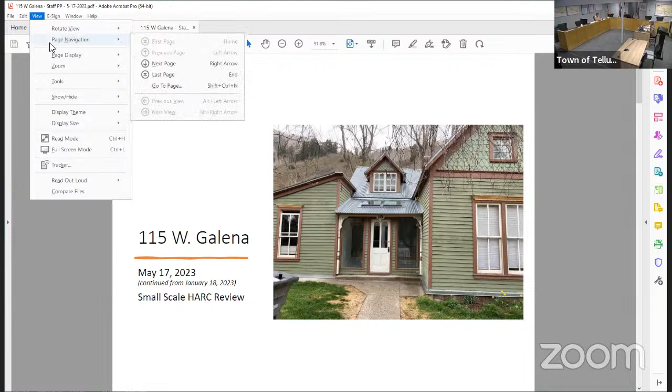Zone district is historic residential. The owner is the No Quarter Trust. Applicant Chris Hawkins, Alpine Planning LLC, and Tommy Hein Architects. Staff member is Jonna Wenzel, Historic Preservation Director. And we'll start with Jonna.

Thank you. Before I get started, we received public comment from Mark Shambaugh, the neighbor, earlier today. Did you all have a chance to read his comment? Yes. Great, so it's been a while since we've reviewed this project, so I will run through and orient.

The site is located on the north side of West Galena between Pine and First Streets. The existing structure is supporting, and it was built around 1898. The house still retains a high degree of historic integrity despite several small additions that were built after the period of significance. There are several rated structures in the vicinity, and there's a local landmark across the street to the south. The Sanborn maps show the footprint of the house has not changed much during the period of significance. There was a small stoop at the southwest corner that was enclosed between 1904 and 1908, during the period of significance. One of the conditions previously was to keep that enclosed, which I'll show you here in a second.

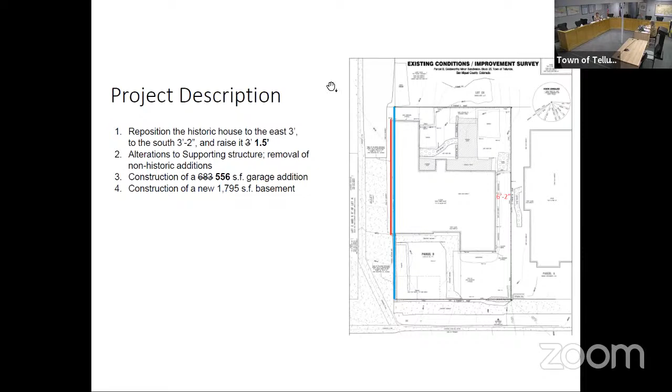In January, HARC continued the project with 24 conditions. The applicants have complied with most of the conditions, but staff finds that there are still 9 of those conditions that haven't been addressed in the revisions, and so have been retained in the proposed motion, and I'll go over each of these to explain.

So the previous condition number 1 was to eliminate or significantly reduce the repositioning to the south. As I've discussed in the memo, repositioning is supported by the design guidelines when necessary for the preservation of a structure. The repositioning to the east 3 feet, for example, is supported because the house is sitting over the west property line and is encroaching into the alley. So in this case, staff supports the repositioning to the east.

However, repositioning to the south appears to be necessary only to provide greater separation between the house and the new garage. Without moving the house, there would be 7 feet of separation between the two. The minimum that can be approved by HARC is 6 feet. So it seems that the repositioning could be eliminated or at least reduced. Staff has retained this condition as new condition number 1.

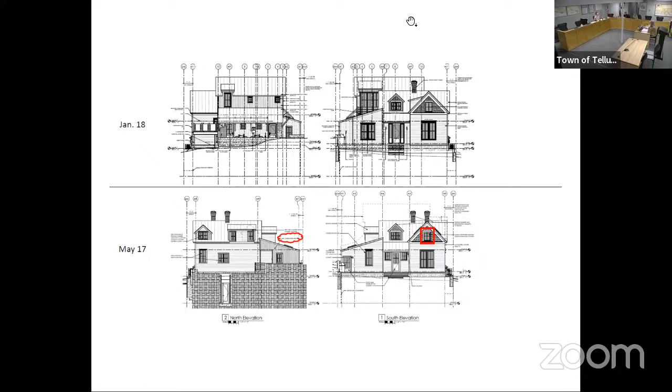Who's representing the applicant? Hi, Chris Hawkins with Alpine Planning. How is everyone tonight? Thank you for hearing us this evening, and thanks for John's presentation. We just have a short presentation.

John went through the repositionings that we're asking for, and we do want to talk a little bit about the repositioning. The proposed biggest change in this design was the garage. In the prior plans, we had an addition to the house with a connector and a home attached to it. Staff really wanted to see just a detached accessory garage, and to remove the building attachment, the building addition. That has been the biggest change since the last plan we saw back in January, an effort to address staff's concern and move this home in a better direction per the design guidelines.

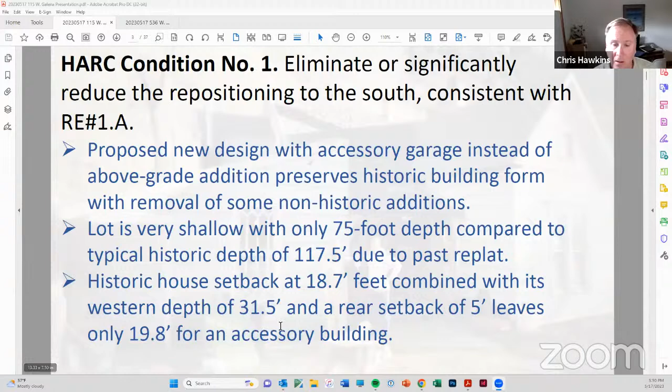When that occurred, other things come into play because the lot is only 75 feet deep, not a typical 117.5-foot deep lot like the rest of the town. You have a historic setback in front of 18.7 feet, and the house is about 32 feet deep. Then you have a rear setback of 5 feet, leaving only 19.8 feet for an accessory building. So we understand that's what we have to work with.

But within that, we also have to provide a yard between the primary building and the home. Overall, we basically have 10 feet 3 inches between the home and the accessory building, when 15 feet is desired. And it's really a small garage, 12 feet 8 inches by less than 20 feet. That footprint is needed to get bikes and cars in the garage, open up doors, and have a functional garage.

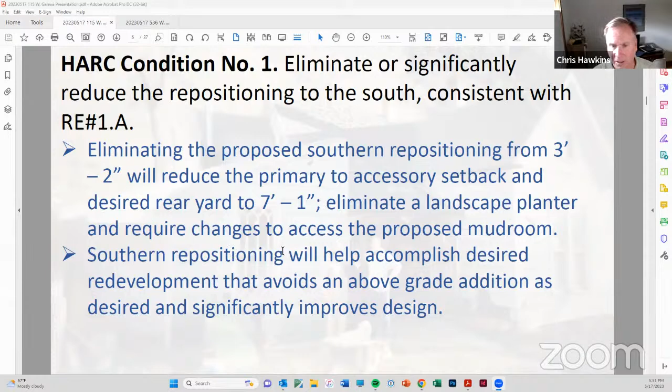So the main reason we're asking for this repositioning is to address the main concern on this small lot: how do you do a sensitive redevelopment of this property, preserve the original building, and get the desired yard in between? Those were the main push-pull factors we were looking at. If it needs to go back to 3 feet, it's going to change that yard quite a bit, becoming about a 7-foot yard. It would eliminate landscape planting in the backyard, and there'd be some other smaller changes. We just think this is a good repositioning to help accomplish the desired redevelopment on this site.

When you look at the before and after plans, you'll see some dramatic moves that were made. This outline is the height of the house that was an addition behind the front view, and this is basically looking at it from the west elevation. Again, this is what was proposed — it was a full-on addition connector. And now what we have proposed is a detached accessory garage.

So it's definitely subordinate, and I wanted to touch on that per Mark's email. When you're dealing with a detached building — and I believe this is considered a detached building because it's just an accessory garage, John could clarify — I'm not sure the rehabilitation standards apply. I realize there's a below-grade tunnel attachment, but town staff has been allowing those for detached buildings not being evaluated per the RE standards, for 2 or 3 projects we've been involved with: 226 North Pine, and 336 North Oak as well. Now we're proposing a similar treatment here.

But again, a big change between those two things. This is looking at the original east elevation — you have the connector and the taller building, and now you have a completely detached garage. This is a small mudroom on the back right here. These are not attached at all on the side.

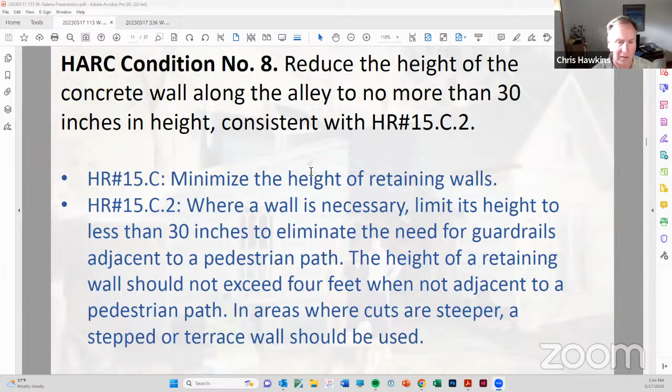When you look at it from a side view, you can clearly see it's not retaining earth here, and this is the part of the wall that's above grade and acts more like a fence. We understand there are design guidelines for fences, and in this situation we are asking for a masonry fence, which is allowed by the definition of the land use code. But in this instance, we'd like something more solid and structural for the reasons already mentioned. And with that, Tommy, did you have anything to add?

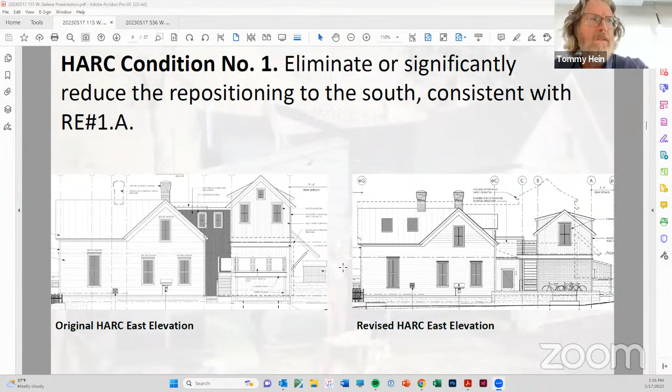No, I think you did a good job. The only thing I wanted to add about the repositioning, I think, is when you look at this house in relation to Mark Shambaugh's - and Mark, I love you.

If you look at the streetscape and the context site plan, I don't know if we have that, Chris - how dwarfed this house is relative to Mark's and the other neighbors. If you look at the site plan, the relationship to the neighbors, we're still slightly behind Mark Shambaugh's main facade, then his bay window comes out.

We still have a significant yard space, and there's really an awkward relationship to the drive-in across the alley, the corner drive-in across the alley to the neighbors. So creating privacy for the outdoor space here with that wall - like Chris said, it's kind of an homage to the wall that's there, but it's really for privacy and safety from the cars.

And I don't think anything we're doing here is detrimental whatsoever to the rating. This is a supporting structure. I think we've acquiesced and come back with a significantly more modest, respectful approach. And I'd like your guys' support on the repositioning.

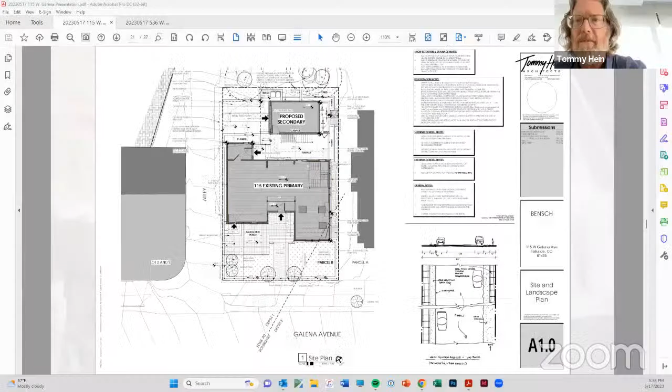I might have to defer to one of my guys, Bob. Devin, do you have that info that Bob's asking for on the ridge heights? There's no roof ridge here, but trying to - maybe on the elevation, Chris, on the alley elevation. I didn't see anything, that's why I'm asking. Yeah, no, I think we can get this information here, let me zoom in on this one.

Devin, are you muted, or can someone unmute Devin for me? It's on A 1.3. Okay, we have ridge heights for both structures. Sorry. All right, can you guys hear me now? Yep. Hold on, I'll pull up those dimensions, just give me a sec. Looks like I missed it.

But I mean, I think the important part is that you really don't see the secondary structure from the street, from Galena - the primary blocks it out.

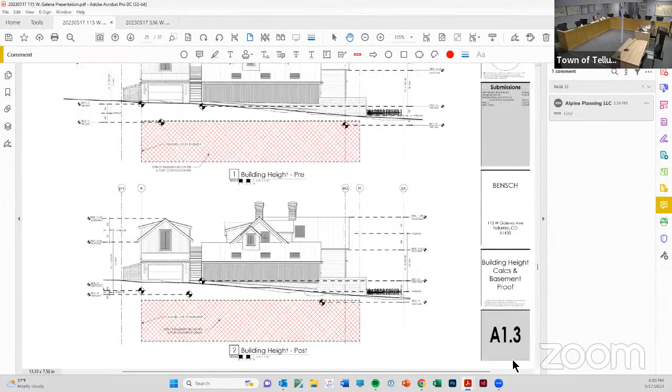I see none. Seeing none, we will move on to the board review. Anybody want to start?

I'll start. I think staff has nailed the conditions here. I don't have any new ones to add, nor do I contest any of them. I think the primary thing to talk about is the amount of reduction of their requested 3-foot 2-inch or 3-foot 3-inch move to the south.

I just found out about the garage and secondary unit - doesn't seem like that can be made much smaller or lowered. That's my brief comment.

Just to clarify what you said - you meant the distance between the structures? Yeah, their request to move the historic house forward. Right, we're moving it 3 feet 2 inches east, not south. Yes, it's been approved, and then we're moving it forward 3 feet 2 inches.

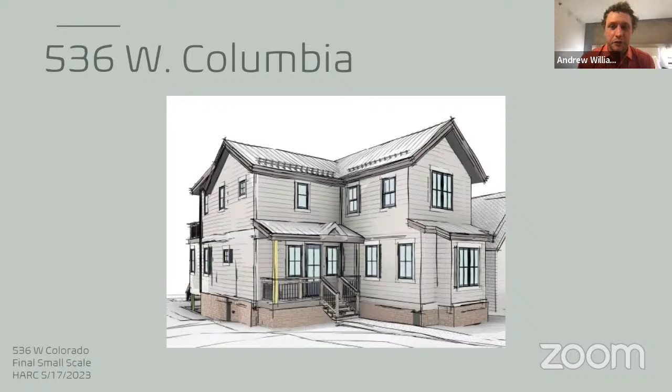Great, thank you. Can I interrupt you, Erica, real quick? Yes, of course. I need to recuse myself from this. I am business partners with the applicant. Okay, thank you. Okay.

All right, this is the final small scale review at 536 West Columbia. This project was first seen in December 2022, where it was continued to March, and continued without discussion to May. So it's been a while since you guys have seen this one. It is located in the historic residential zone district in the historic residential treatment area and is located inside the historic district. The house and shed are both non-contributing without qualifications.

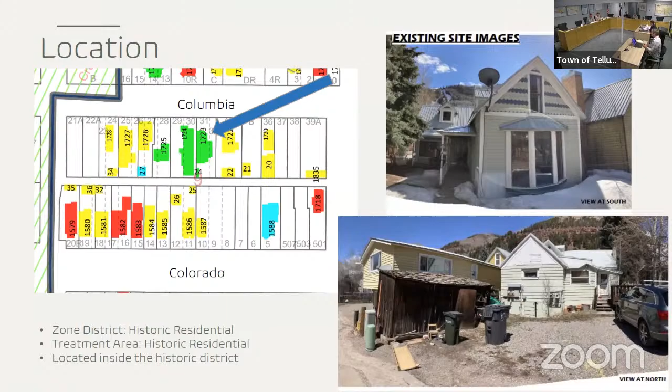Previously, the applicant was proposing to keep about 300 square feet of the front gable form of the primary structure. Now the project is proposing complete demolition of the primary and secondary structures and new construction of a primary and secondary structure. These are the standards for demolition, which staff finds have been met.

The first condition was to increase the front setback to at least 15 feet. It has now been increased to about 17 feet. This was the biggest issue with the previous proposal, and they have significantly increased the setback.

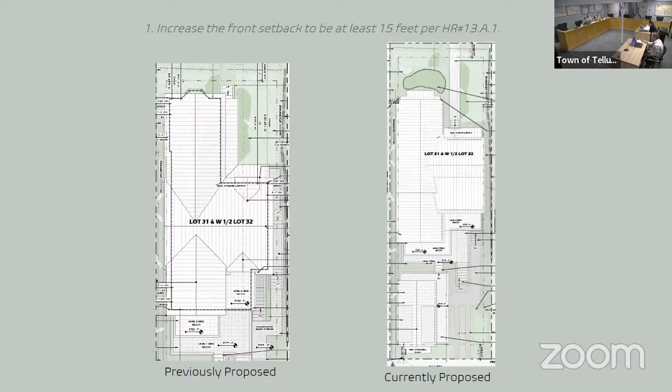Condition 2 was to provide greater stepping down to the alley. A shed roof was added on the alley structure, but the main house is still one vertical wall plane with decks, and there's no change in the wall plane on either structure. This condition has been retained.

It is a discussion about if decks provide stepping down or not. You guys can discuss that.

Condition 3 was to provide greater stepping down to the street. With the larger front setback, the mass and scale does appear smaller from the street, and this condition has been met.

Condition 4 was to more clearly define the front entry. It is better defined with a central path to the front porch and centralized front stairs.

Condition 5 was to increase the open space between the primary and secondary structure. It was increased about 2.5 feet. There's still not much open space, but because the front setback was increased so significantly, it seems appropriate that there is not as much open space in the back.

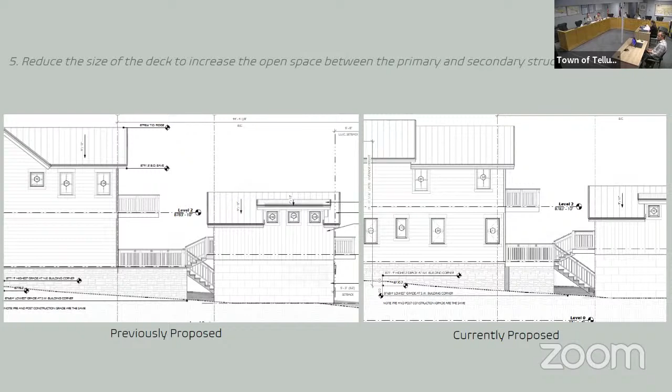Condition 6 was to revise the north-south gables to be of the same pitch. They are all 9/12 now.

Condition 7 was to inset the south edge at the second level southeast deck. The deck now connects across the entire facade. The intent of this condition was not achieved, and it has been reworded to make it clearer.

Condition 8 was to move the trash enclosure next to the garage to minimize its visual impacts. It is now located on the east side of the garage.

Condition 9 was to reduce the number of doors on the south elevation. The number of doors did not decrease, but increased. The 4-pack on the first level was reduced slightly in size, but another 2-pack of doors was added. So this condition has been retained.

Condition 10 was to reduce the size of the deck on the secondary structure. The deck on the south side of the secondary structure was removed. There was a typo in the memo - it talked about the primary structure, but it was removed on the secondary structure, and this condition has been met.

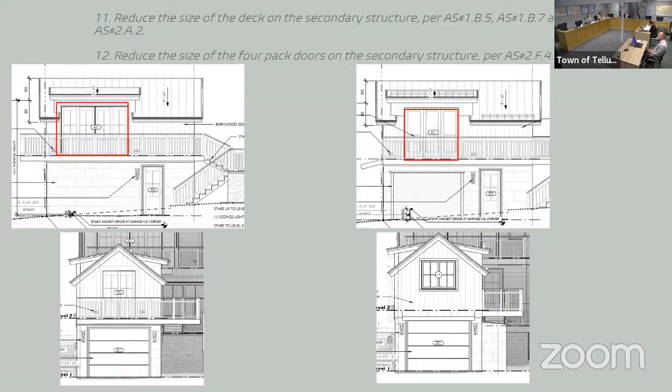Condition 12 was to reduce the size of the 4-pack of doors on the secondary structure, and they were reduced to a 3-pack.

Condition 10 was to revise the front deck posts as to not mimic historic details. They were revised to a more contemporary design.

Condition 13 was to revise the landscape plan to be of a more traditional residential character with trees, flowers, and shrubs. The landscape plan has been revised to include multi-stem aspen and plantings.

Condition 14 was to install snow guards, brakes or other devices to prevent snow and ice shedding onto adjacent properties on both the primary and secondary structures. Snow guards were added, but are still needed on the west side of the roof on both the primary and secondary structure, and the east side of the roof on the primary structure, to prevent snow shedding onto adjacent properties.

Conditions 1 through 4 are conditions that have been retained or revised. The only new condition is condition 5, which is to revise the trash enclosure to be open on 2 sides to ensure that per the land use code it is not enclosed space. It is only open on 1 side, so it just needs to be open on 2 sides.

I'm happy to answer any questions before we hear from the applicant who's here in person with us. I have a question, Erica.

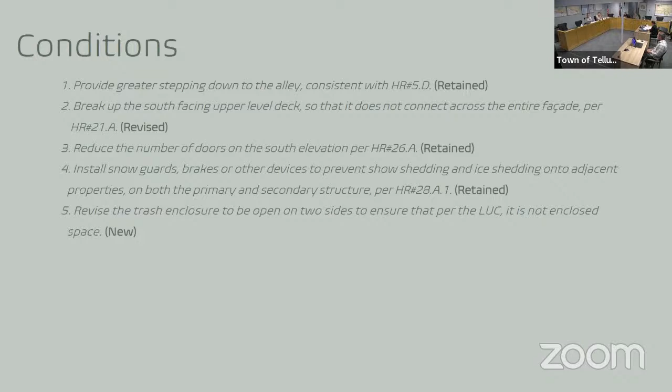On number 3, reduce the number of doors on the south elevation, it looks like there have been some windows added. So I'm curious, in your opinion, if this condition is really about the glazing or the number of doors. I'm wondering if we broaden it to allow them to reduce the number of doors or reduce the overall glazing for that elevation.

Yeah, I think that condition does specifically refer to doors, to maintain the traditional pattern of doors along streets and alleys. I think there are too many doors for the size of the house on the alley elevation, but that could be a discussion about whether it's about the number of doors or more about the amount of glazing.

Thank you. Any other questions? Okay, very good. Well, let's hear from the applicant.

Great. So Dylan Henderson and Chris, you're here. Yep. Dylan, do you want me to share my screen in the presentation or do you want to? You can go ahead and do it. I could always share after you've completed it if I want to jump into the architecture. It's up to you. Sure.

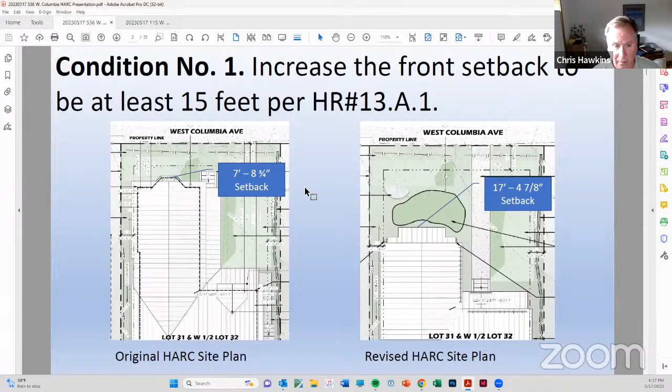So Chris Hawkins, Alpine Planning. Erica has already run through some of these, so I'm just going to touch on it. Again, a dramatic increase in the front setback between the original and revised plans.

The stepping down to the alley—I think it'd be good to have a discussion about this, because this building, are you looking at that just on a building by building basis, or are you looking at it across both building forms together? Because we already have a stepping coming down off the roof to this lower level. It looks like, is that about a foot, Dylan?

Yeah, and I actually have the model up, so I was going to share that. Just okay, I'll let you talk more about that. But then you step down to decks, and then you've got the alley structure further stepping down with the deck on the east side, and then a little shed kicker roof. So we really feel we meet that requirement, and if not, it'd be good to get direction about what sort of stepping are you really looking for.

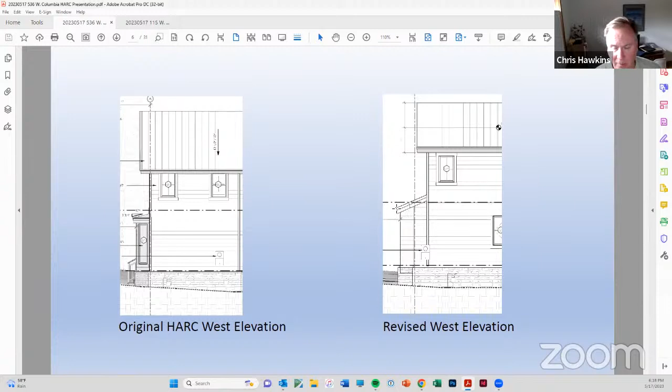So condition 3, 4, and 10 are kind of, 4 and 10 are very related—more stepping down to the streetscape on the front. The bay window was now replaced with a shed roof form on the front. So we have stepping on this first westernmost wing. And when you're looking at it from the front, between the original and revised plans, there's even more stepping now, with a front porch element down to railing, stairs leading to sidewalks.

So we feel that condition is well met. This also illustrates the revised front door with a more traditional centered front door, 2 windows on the side, and simpler railings to not confuse history. So we think all of those conditions have been met.

Reducing the size of the deck—it was reduced down a couple feet, from a 7-foot setback to a 5-foot setback in between. Condition 6, the north-south gables, those have been revised to match.

Condition 7, insetting—it was here, and we understand now that Erica would like to see it inset here, with this deck and this deck here. I'm not sure, Dylan may have additional comments on that.

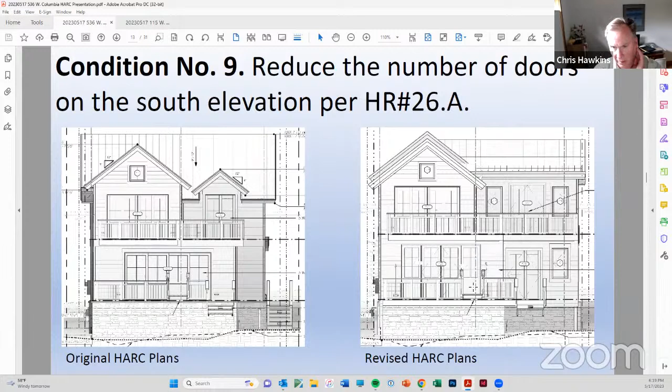Trash enclosure has been moved. Condition 9, reducing the number of doors—I'll let Dylan comment on that. There's a little bit of functionality there, because if you have 2 decks, you're going to need a deck entry here, and there's, I'm sure, a little bit of functionality at play with the floor plans as well.

Reducing the size of the deck on the secondary structure—Erica already talked about this one, but it shows the big change.

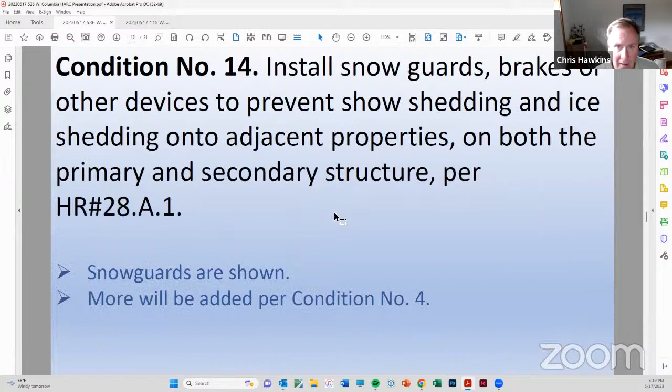And then revising the landscape plan, there's now a planter bed and a tree in the front yard and revegetation on the rest of it. And then 14 is pretty straightforward and understood that it needs to carry on.

So Dylan, I will stop sharing my screen and let you talk. Right, so I was going to share here my Revit model.

So I just wanted to talk about the decks and then the stepping, because I think those are the two significant changes to the overall design of this home. Originally at the front entry, we were keeping the existing front of house, and we were also keeping the front of pathway.

I just wanted to point out that the client, Ben Jackson in this case, was really adamant about keeping that historic proportion of the front of the house as it faces the street, which in this iteration we kept as well. So I was really happy about that and keeping that narrow profile facing the street. I think that's great.

Centered up this front entry as the staff had pointed out as a condition of approval, and as Chris had pointed out to you. So when we get to the back of the house, I totally understand the comment on the number of doors. I have these decks. There's not much yard space because of the accessory garage unit and the parking at the rear of the house - there's really no functional yard space.

So these decks become the yard for this house, and they have great views of the ski area, et cetera. I've got decks coming off a bedroom on the first level - coming off master and coming off guest.

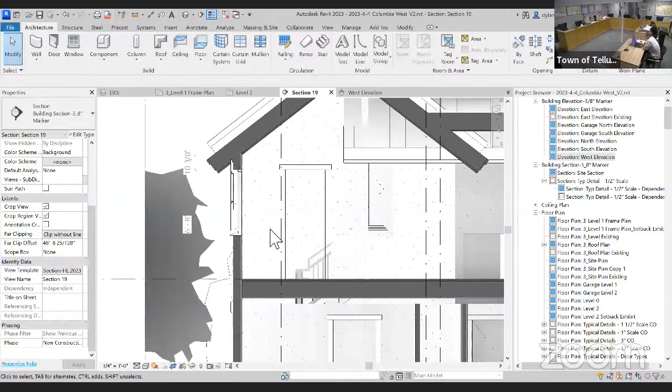So functionally, if we did that in steel, I suppose I could get a 6-inch header to work, but typically we like to leave 10 to 12 inches because structure wants to put an LVL in there as opposed to steel. So I could squeeze a few inches out if we went to steel headers. And then I drive my plate height off of that.

When I show you this west elevation, I'm already maxed out on this upper level roof, so I can't raise that roof to increase this step. I do step this down toward the alley, then step down to deck, then step down to this, and then step down to shed.

So I do feel like we functionally accomplished the stepping toward the alley. And I would hate to start to put this dining area up into a gable where I have to solve it all with dormers to create headspace. So I think I could get something out of this, but I would hate to be pushed down so far that I start to really cramp how you're living in the space.

So those were the big things I wanted to talk about - this functional deck space facing the south elevation of this house, the access onto these decks from the two bedrooms on the first level, and then living and kitchen upstairs, and then the stepping down, which I do feel we've accomplished. The other conditions I think are straightforward, and I can work with Erica to get that worked out. But I'm hoping we can get a little leniency on the stepping aspect, based on what I feel we've done our best to accomplish on this.

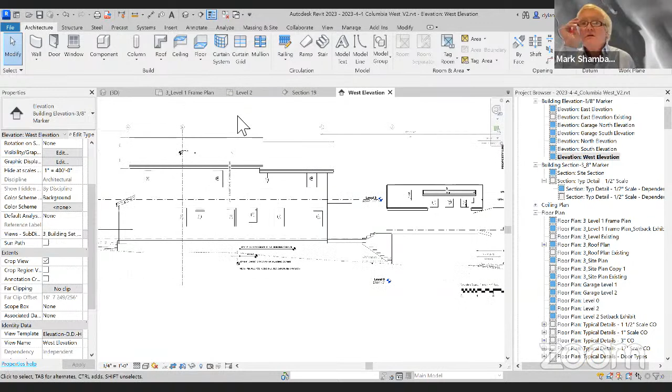Hey Dylan, what's the height of that shed roof or garage roof versus the house after you've stepped down the house? So you want the distance from here to here, Mark? No, the height of those two ridges. So average height or overall? The average, that average height right there versus on the garage ridge line. The bottom of eave, this is rough, so don't hold me on that, I'm going fast here.

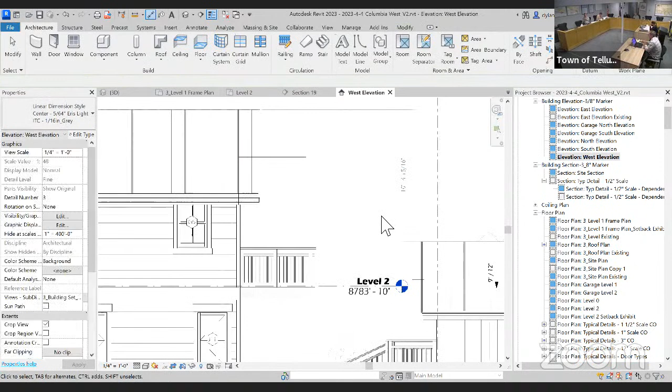So you want this to rear grade elevation at garage, or where do you want it pulled to? Mark, the top of the garage ridge. Oh I see, go from the top to the top. Yeah, just looking for the delta. It steps down about 7 feet. Oh okay, yeah, so it's 10'4 and 15/16 difference. 10 foot, okay, top of ridge to top of ridge. Thank you. And then average to average, it steps down 9'7 at 15/16.

And that garage is how much above elevation? The top of the ridge line is above the alley. Yeah, I mean I'm at my max of my 16-foot average now, because of the way this slopes toward the rear of the wall. And you'd have maybe 6 inches is about it to bring it down, if we didn't have a change in wall plane. What are you thinking, like that garage roof, just bring it down?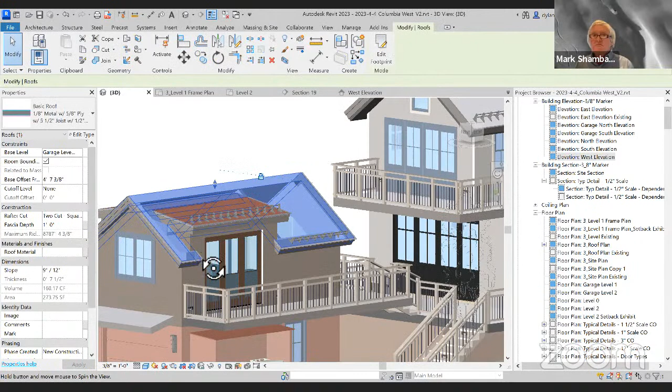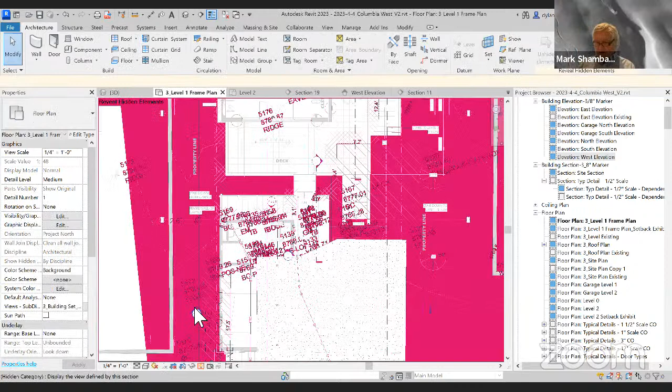Yeah, let me answer that here. Hold on a sec, I can answer that question, just have to get this bar out of my way. So I'm pausing because I need to pull a section through this to tell you what that plate height is, because I'm already up in the dormer there. I just want to make sure I'm not answering this inappropriately.

So this is what that roof profile looks like. That's at the dormer, and then down here at the gable where it connects, I have a plate height of about 5'6". So I've got dormers to make it livable, and then the plate on this gable as it goes north-south on the building is a plate height of 5'6". So I could get it down to 5'0", but I'd hate to be much lower than that.

Okay, thank you. Dylan, do you mind panning out a little bit? The neighbor to the west of you, that structure, how far does that plane out with the alley? Here, let me do this, this is going to be easier to look at it this way. I think this is what you're asking about, right?

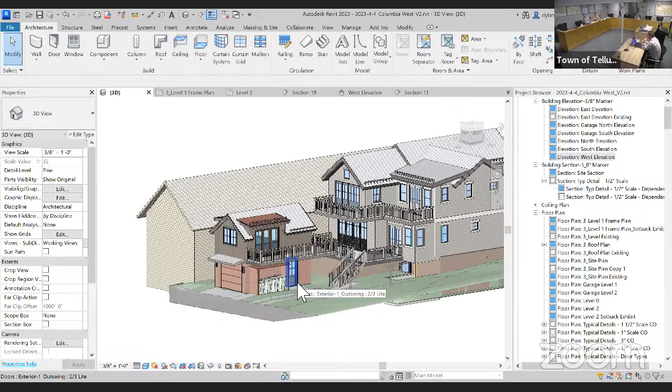Yes, so that's the structure next to us. So are you asking how it planes relative to the south? This is good, I think this is really telling, that's a pretty sized structure into the alley. And then I have a fairly large structure on my east side as well that I can unhide for you, but then you wouldn't be able to see the model. I'd unhide it and spin it around, it might help.

And again, this is a massing model, so grain of salt on this, but this is kind of what we have going on with our neighboring structures.

Thanks for doing that, that was impressive. Did you see that? Yeah. Hands are steady.

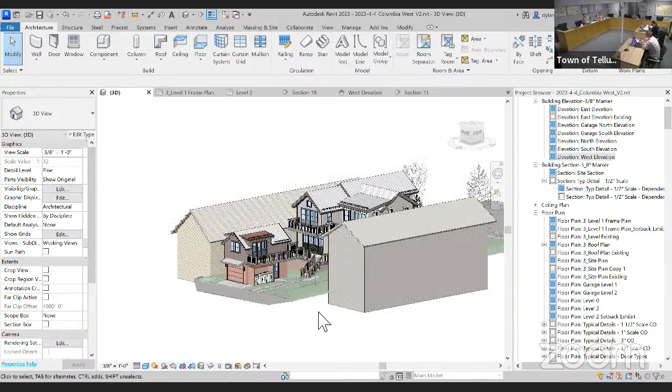Any other questions for Dylan? Any questions before we lose him about the doors versus glass mat on that south elevation? Or do you just want to wait to deliberate? I think that's just a deliberation. It seems to me a lot of those doors are going to be sort of hidden by the garage structure, and I would say it's maybe more of a glazing question than doors, but I want to hear what the rest of the board says.

All right, any other questions? Okay, thank you, we'll hear from the public. Any public comment?

Please raise your hand electronically to comment. Going once. Twice. Okay, we'll move to deliberations.

Please comment first on Erica's 5 conditions, and then any other additional conditions or adjustments to those you suggest, and we'll discuss it, whoever wants to go first.

I'll go first. I'm not sure if, I think number 1 needs to be addressed. I think this view on screen is kind of telling, this is similar to the project we just reviewed. Tommy's project is a pretty small garage and space above it, pretty modest height, 5.5 foot plates, with some sizable structures flanking this property.

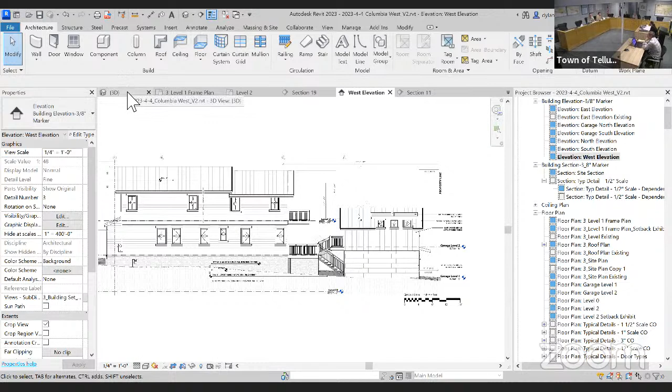Anyway, so maybe that's just up for discussion. I don't really have a problem with the shed roof. I think to the pedestrian walking through that alley, it'll be stepped down, and stepping the upper portion back, just as an architect, makes for really bad detail, but we did discuss that for some time, I think it was on a commercial building. I just want to bring that up again, really for no other reason than to be consistent. I don't have an issue with this shed roof, but stepping that upper level back will cause a larger roof there, right? So we'll have to cover the garage.

Anyway, so I wanted to discuss that, and then I agree with staff on reducing and placing the doors on the south elevation for this time.

I think a lot of times when we've had discussions about that stepping down and what constitutes a step down, it's been with 3-story facades. I think the context here is the overall stepping down of the project to the alley, and the rear facade of the house is so far removed, so far back from the alley. As Dylan showed, from ridge to ridge to ridge to deck to ridge, there's a lot of stepping there actually, I think. So I'm fine with it too, I'm fine with striking one also.

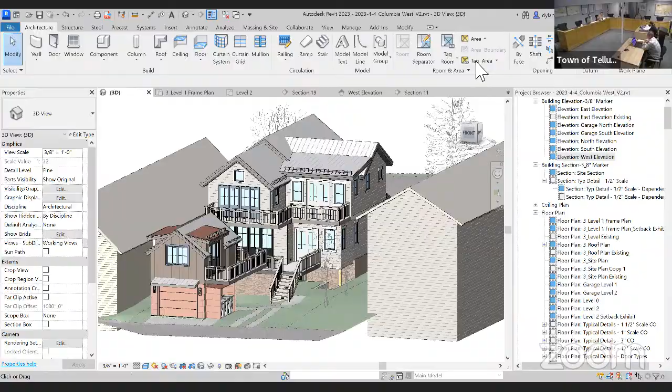Mhm, really good. So it's like the upper left shrank. What were the series of doors and windows before this shifted? It was kind of almost the same amount of glazing, and then another pair of doors were added, and 3 windows.

Mark, I would go with your suggestion of and/or, Matt. But I think it would help if I took a line down from the second, the top floor, all the way down, that would make it probably 3 larger doors in the bottom, however they'd configure it. But then again, it's behind the garage, so I don't know. To finish off, I would go with an and/or reduction and give them some room to play with it, like you suggested.

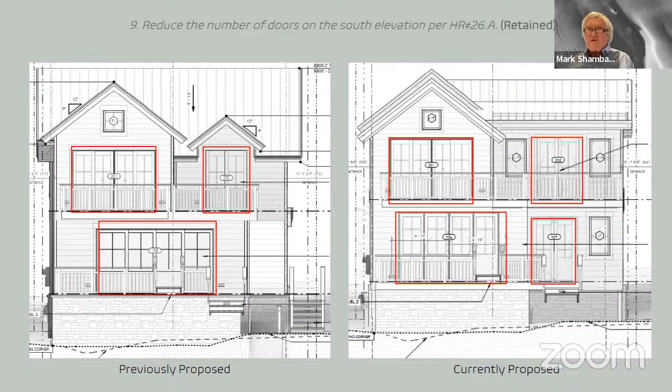And of course, we had 10 feet stepping down from the house ridge to this, but I would suggest, since he agreed to it, the 6 inches on number 1, and I'm okay with the decks on number 2, and I could go with Matt's wording on number 3. Again, it's pretty much behind the garage, except when you're approaching from the east, or west.

So Andrew, you want to weigh in? Andrew's recused. Oh, well, that's why he's silent. Okay, that's right, I forgot. Well, anyway...

Can everybody agree to the 6 inches on number 1 and use Matt's language on number 3? And do we strike 2 or narrow the decks on 2? What do we want to do so we can finish this?

I'm okay with it. I haven't chimed in on the decks since these guys talked. I would agree with striking number 2. I will say, Mark, I would be concerned about asking to lower the garage roof because you're either going to get a change of pitch, or I don't know how much of that space is going to start to be usable and count as square footage if you drop it below 5.5 plate.

I think it was pretty compelling with that 3D view and the massing of the sides. I think that garage is appropriately scaled. Okay, let's take a straw poll. Everybody okay with no reduction in height? Yes, I am. All right, then we struck 1 and 2.

Three was, and is there anything else before we have a motion? I think we're ready. I could make the motion if no one else has anything else to discuss. I can do it if you want. Okay, I think I've got the wording right here.

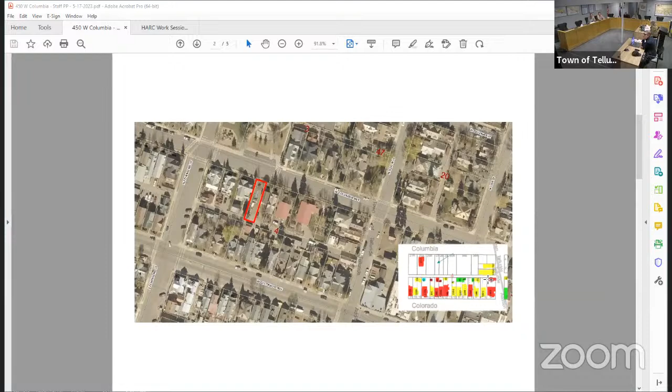Jonna: Thank you, Chairperson Shambach. This is an application for new construction of a single-family residence and a detached garage. This site is on the south side of West Columbia Avenue between Aspen and Townsend Streets. It's inside the historic district, and there are a few rated structures on this block of Columbia, but there are several to the south which face Colorado Avenue. This lot is vacant, and the Sanborn maps show that this lot has always been vacant. There's been no development here previously.

The proposal is compliant with the land use code dimensional requirements and appears to be compatible in mass, scale, and design with the neighborhood. I'll mention that this project was previously reviewed and approved by HARC in October of 2020. Unfortunately, the CA was never issued because revised plans incorporating the conditions of approval were not submitted within 60 days, and so the approval was deemed null and void.

The submittal before you today is the same design that was approved in 2020 and includes the revisions that address the previous conditions of approval. It was reviewed under the same design guidelines that we have now. But staff has just a few new conditions that address a couple of changes from the previous, which are to include the location of utilities and vents on the final plans. That's standard. The second one is to move the trash enclosure to the north or east side of the garage so that it is accessible without encroaching onto the neighbor's property.

On the site plan, you can see the trash enclosure is between the garage and the property line in the side yard setback, which is permitted, but the access to the trash enclosure seems awkward, and it's not clear how it would be accessed without going onto the neighbor's property.

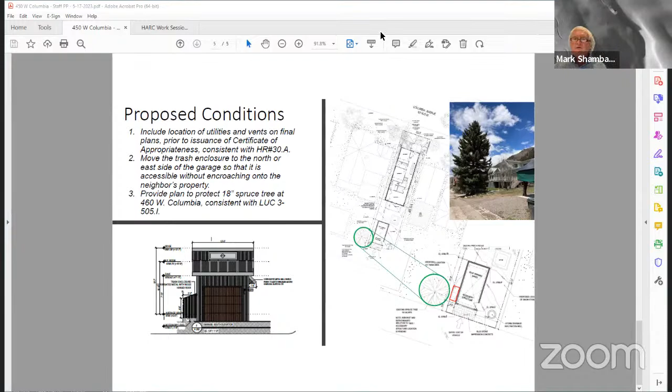Okay, let's hear from the applicant. Welcome. Thank you, and it's nice to be here in person. Let me just make sure my screen is being shared. Okay, great. As Jonna said, I'm Richard Garber from GRO Architects, representing the client, James Straka.

We've been working on this house for a number of years, and it was unfortunate that we did receive approval, as Jonna said, in October 2020. What was missing specifically was some grading plans and information. And if everyone remembers 2020, we were in the middle of the pandemic, and there was some uncertainty about the owner going through with the project. He is now very much committed to it, and those grading plans have been supplied.

So briefly, I'm going to take you through a little bit of the zoning and then very specifically address Jonna's comments. So as you see here, the site is isolated. It's a fairly narrow site in the historic residential district. You see here a Google aerial. These are photos that I've taken on my current visit. You could see our notice with the mountain in the background, and then the view up the lot facing the school.

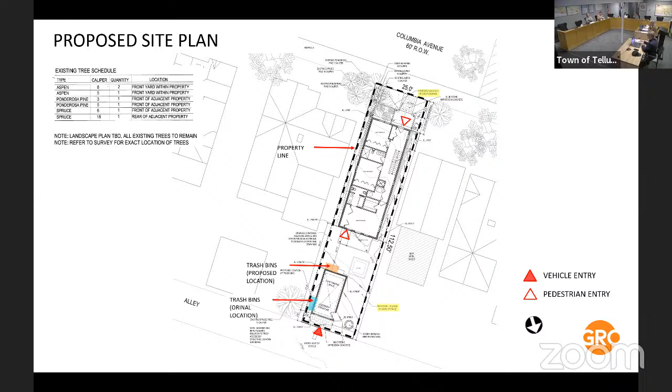I'll show the plans very quickly. We are completely compliant, just showing the dimensional requirements, so there's no deviations being proposed. I can obviously go into these more if there are any questions about that.

Just very briefly, it's a single family residence. I already talked about the zone. We have a lot size of 2,812.5 square feet. Our proposed principal building is 1,928.88 square feet, and our proposed principal accessory structure coverage is 231 feet.

So that's something I wanted to draw everyone's attention to. It was listed in the report as 462. That's because initially we had a second floor proposed in that. We actually now may have a small loft in there at max, but because of the new roof pitch I'll show, from previous comments, this is really only 231 feet. So we're actually further under coverage.

Maximum building height is 25 feet. That's where we are. In that accessory structure, there is one enclosed parking space. Trash bins and snow storage are provided on site, and I'll show you in one of the conditions that was listed, our proposed new condition for the trash bin, bike storage in the basement, 15-foot front yard setback.

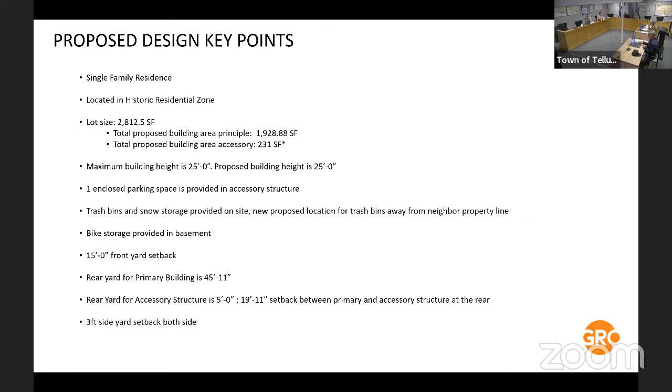The rear yard for the primary building is 45 feet 11 inches, rear yard for the accessory structure 5 feet, and that gives us a 19-foot 11-inch space between the primary structure and the accessory structure. I'll show a site plan next, and then there are 3 feet side yards.

And the building plans are quite simple, they haven't changed, as Jonna has said. We have a basement area for storage, including bike storage, which I have highlighted here. 3 bedrooms on the entry floor, including the ensuite in the rear, which would have views to the mountain with a deck, which is really great.

And then our proposed second floor and roof plan. The second floor is one continuous floor with a dining, kitchen, living type arrangement. And then you see our roof plan, and you can see in the roof plan our snow guards, which were part of the design guidelines.

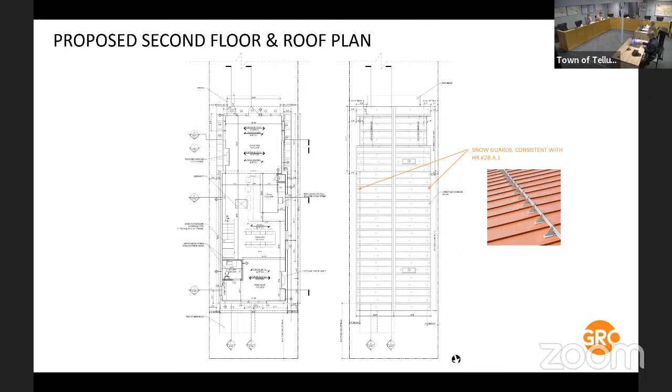That proposed garage I mentioned, so this is the 231 square foot footprint in that accessory structure. You see here the trash bins in their original location, which is on the lot line in the middle drawing, and I'll show you how we think we can reconfigure those.

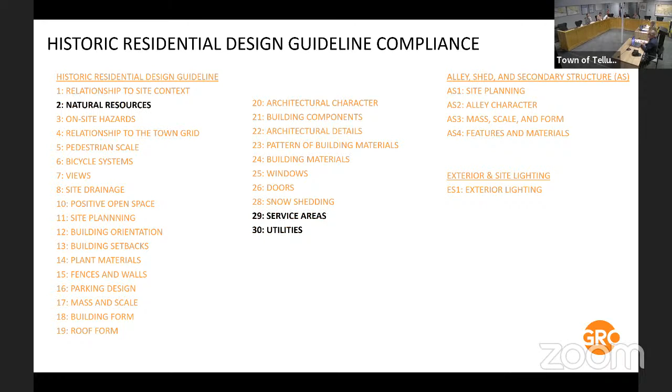So really quickly, in terms of the historic guidelines, there's a lot of them. The 3 that Jonna drew everyone's attention to, I'll try to address first, and then I'll just kind of quickly go through the others. So starting first with natural resources, the tree.

We don't really have any issues with the aspens in the front of the site because of the setback. That rear spruce, it was on the initial survey we got, was actually sited incorrectly. That's been corrected, and as you saw from the photos, its tree canopy does indeed extend into our yard.

I've reached out to the owner of the adjacent property multiple times recently, have not heard back from him, but during our previous approval process, I was in touch with him, and we vowed to work with him then. We vow to work with him now. I think basically there'll be some exploratory digging to ascertain where that root structure is and figure out what to do about that without harming the roots of that tree.

I will also note, and you can see from one of those photos I had up before, just beyond this canopy there is some electrical and infrastructure equipment that sits on a pad. So we're going to take all of this into consideration. Again, this is fortunately only for the accessory structure, which is a fairly small scale thing.

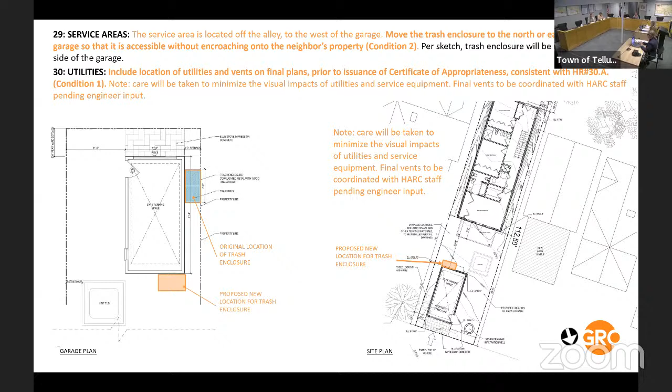So it would be in that 19-foot 11-inch space between the main house and the garage. And it's simple enough to basically take the trash from there and just move it right around to the alley where collection will occur. So we see that as a nice solution, and again, absolutely willing to do it.

So those are, I think, the primary conditions. Just to go through site context and materials, I think everyone has reviewed the plan.

This is a slightly more contemporary take on some of the Victorian motifs and proportions that you see in town. You see here the site materials called out. This is the front elevation of the house.

I have some materials I'm happy to pass around. We're finally back doing these in person, so I can bring materials again. I can bring them up in a second. I'd like to see them.

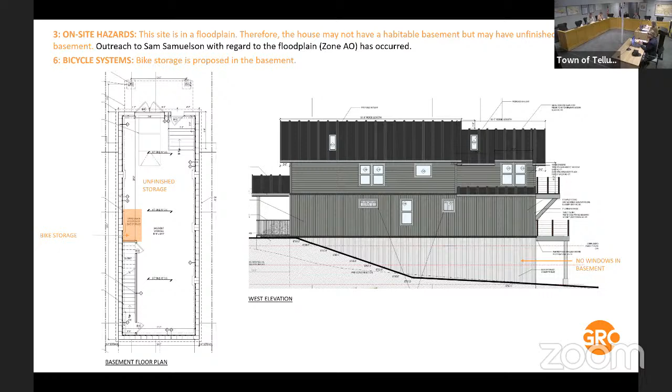With regard to on-site hazards, it is noted the site is in a floodplain, in zone AO. We've had numerous comments with Sam Samuelson about this on the way to permitting, and we think that through the grading plan that's been submitted, we have that very much under control.

Relationship to the town grid—this is that block elevation shown again. The addition in the house next to us has actually expanded since I was last here, but nonetheless, I think our house is appropriate, and also appropriate in terms of size.

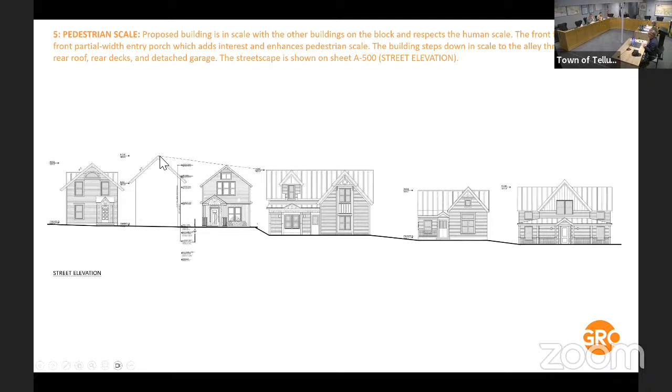Here you see that dashed line showing the edge of roof height adjacent to us to the right, our roof height, and then the height of the neighbor, whose house I understand was actually created before the guidelines were in place, so it's a little bit taller.

No issue there. Pedestrian scale is being handled through the step in the roof that occurs—you can see that in the east elevation here. It's occurring in a small decorative motifed roof that exists on the front elevation at the front entry door.

The accessory structure, as I noted before, was originally planned with a second floor. That roof, since our last appearance at HARC, has switched from a gabled roof to two shed roofs at a further step. You can see in the diagonal lines I've drawn that kind of stepping that occurs down to the alley, with the accessory structure being fairly small scale.

No views, in our opinion, are adversely impacted. I can also put up that rendering again, which shows the views behind the house facing south to the mountain, the north-facing portion of the mountain.

This is the engineered site plan that was included. I just show it—Rob Harry, the PE that worked with us from Goff, is available on the Zoom if there are any questions. But I do think the site grading is logical, makes sense, and speaks to water management, stormwater management issues, and snow melt issues.

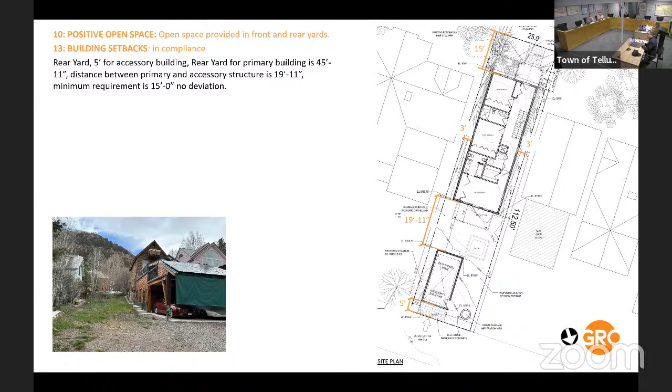Finally, the orientation of that accessory structure allows for vehicular entry from the alley, and we've modulated the size of that structure to fit the vehicle nicely.

The step down that occurs from front to back, you see articulated here in our east elevation. We have a 38-foot ridge length at a 9-to-12 pitch that steps down 18 inches, and then an 18-foot 7-inch ridge length to the back of the primary structure. That roof is an 8-on-12 roof.

Finally, building form—I showed these views already. You see the decks where we have 4x4 wood posts supporting them. There were some initial questions about the thickness of those posts being appropriately sized; they've been re-thickened and now clad in wood.

I have some paint specs here in terms of colors, fairly consistent with what is listed on the Zoom, as well as the colors represented here. One change that has happened is we have this rough-hewn decorative clapboard that exists on top of the building elevation on both front and back. That was a change from a scallop pattern we had some two years ago.

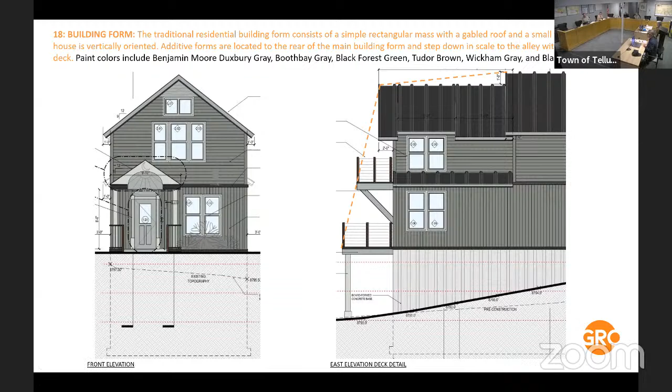You see that again here—this is the roof form, the architectural character of the block, which again I think we're maintaining. This is just from Jana's report: the style of the house is a modern interpretation of Victorian, which is sympathetic to the neighborhood.

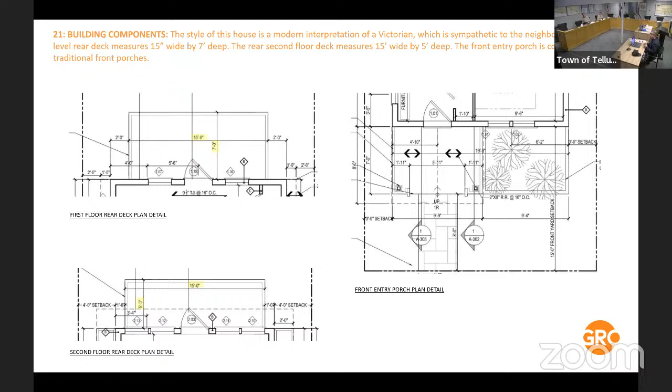The first level decks, which you see here, measure 15 by 7; the second, 15 by 5, so they step as well. The front entry porch is consistent with the traditional front porches, and then you see a view of that, plus some more material callouts on that rear elevation.

Windows, again, showing that we are following the design guidelines, as well as 2 skylights in the roof. And then a kind of final view of the elevations and roof.

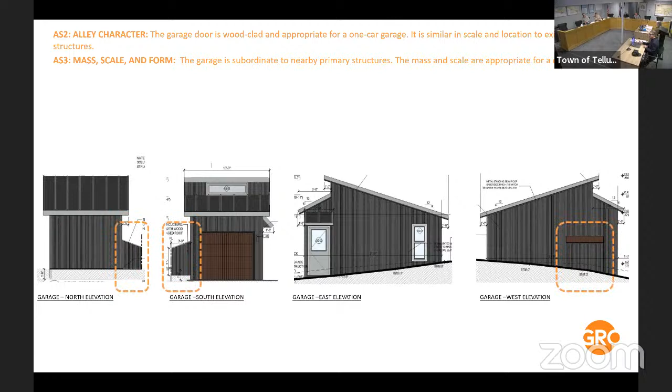Accessory structure, almost done. The accessory structure here shows the location of the trash, which will be moved. And then finally lighting, which is a kind of vertically posted lighting.

It's a great WS light by WAC lighting, and that is primarily a down light, so it will not shine or project out. There's also some lighting on the steps for accessibility. And that is it.

So that's the rendering again with the north facing portion of the mountain behind us. We're very excited about this. We apologize for the delay in bringing this back, but I am here to report that the owner is very keen on moving this forward. So hopefully the board will find there's no significant changes from what we had last time. So thanks.

Okay, very good. Good summary. Questions for the applicant? I have one, while everybody's thinking.

On drawing A202, could you put that up? A202, yeah, I'm gonna just go to my PDF. All right. It's an elevation of the out of the... Yeah, okay.

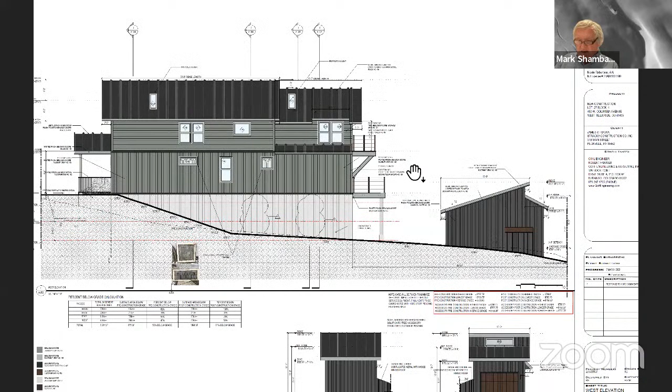So from the grade to the top of the gable, after you step down 18 inches, I'm calculating it's about 22 feet plus from that grade up through those decks, trying to get the height of that wall plane up to the top of the gable. Again, it's stepped down 18 inches from the main part of the house. Is 22 feet about, am I approximately correct? So our 25 feet is, I'm just trying to...

Look at this right now. So the way this works with average grade, the main height here is at 29.3, but when we measure it, it's 25. So if we take that down 18 inches... 27 and a half. Yeah, I can get that dimension back to you, but I think 22 is actually pretty fair.

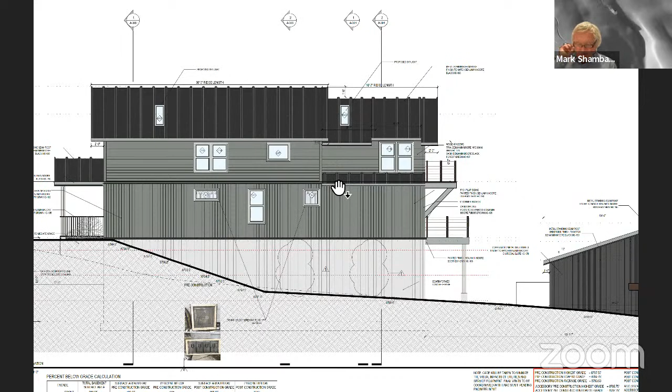Okay, 22, a little over 22, I think. And so that answered my question. My concern was, as you heard in the previous dialogue, we had a 1.5 story, 16-foot tall building where we had a shed roof breaking it up, but we've declared for consistency that decks alone, without a change in wall plane, are not really stepping down the alley. Of course, the question is...

Well, you've answered my dimensional question. I just want to see if any of the other board members have questions about that, and or Richard, could you suggest what could get a further step down besides just using those 2 decks? Because you're at least a little over 22 feet straight up wall plane without a break coming and facing the alley. Yeah, I see.

So I think the one thing I would say about the decks is that when we initially conceived them, they were sort of understood as one mass, meaning our columns kind of went up 2 stories and captured both of the decks. That's now been broken up so that the structural elements of these decks are 4x4 posts that are clad, so they get to be about 8 inches when all is said and done for the base, and that's the longer, deeper deck.

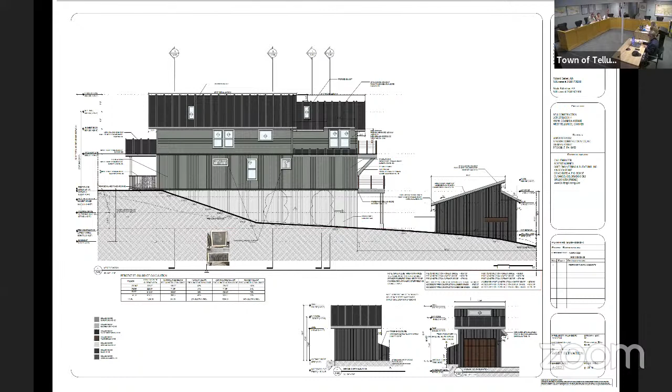And then there's actually a 45-degree structural armature that is projecting out from the building itself. So while I understand the concern about the plane, I actually think when you see this in elevation - and we're looking at the side elevation now, I can go back to the front or back elevation - and I take it this is a flat drawing. This is where a Revit model would be useful, I guess.

But I do think that with the projection of the roof coming past the house by 2 feet, and then the projection of the second floor deck with the 45-degree structural armature, and then the lower deck that projects further - I think visually it's not overly complex, but it works with the concept of stepping down. And 3-dimensionally, you wouldn't really notice that wall as a planar surface.

Now, I suppose we could explore taking a small amount more square footage in the basement and that first floor, which would give you like a true building step. But I'm not really sure how. I do feel like we could probably prepare a 3D drawing for you that might alleviate your concerns. And as a backup, we could look at taking a small amount more coverage.

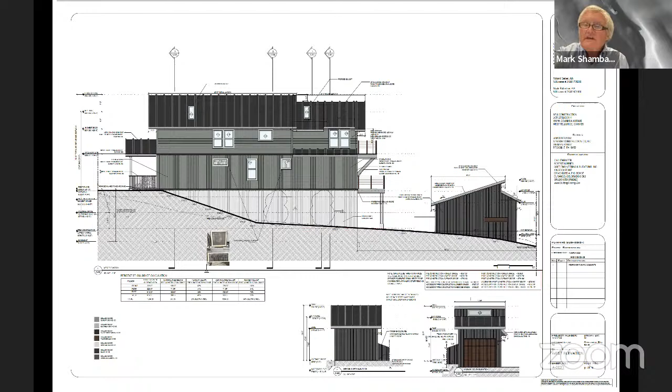Okay, don't hear any. So we can begin deliberations.

We have 3 proposed conditions and comment on, well, they're all pretty standard. I would also appreciate your comment on the step down, which I brought up to the alley. But who wants to go first?

Comments? I can go first. Mark, let me know if this is what you remember. I don't remember this project being very controversial in the deliberations or in the meetings. I think it was a pretty easy approval. There might have been something about the ornamental element at the entry stoop that they resolved.

So I guess from my point of view, I don't see the reason not to just approve it with the condition that Jonna has stated, instead of sort of taking another bite of the apple at this one. Okay. Others?

Mark, I do share your concern with the three-story plane. It's something we seem to discuss at every HARC meeting in one way or the other.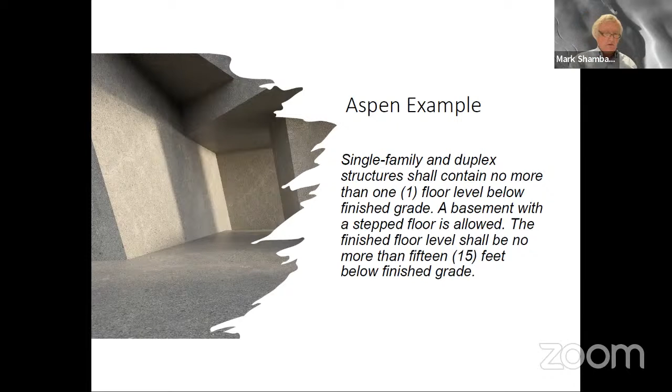First question — your example though would be floor area, not the depth, right? If they had a basement that extended past the footprint of the house. I think they had a basement that was like 20 or 25 feet deep. Deep this way — tall. You could put a basketball court, you could put 2 floors in, or a basketball court. I'd like that. If you're an NBA player, I can see why you'd need it.

Again, I think this is pretty straightforward. However, flat lots seem to differ from steep lots.

It's easy to say we would allow no more than 1 floor below grade on flat lots, so you have 1 basement. On steep lots it's a little bit different because there are several levels stacked below grade, so we might need slightly different language.

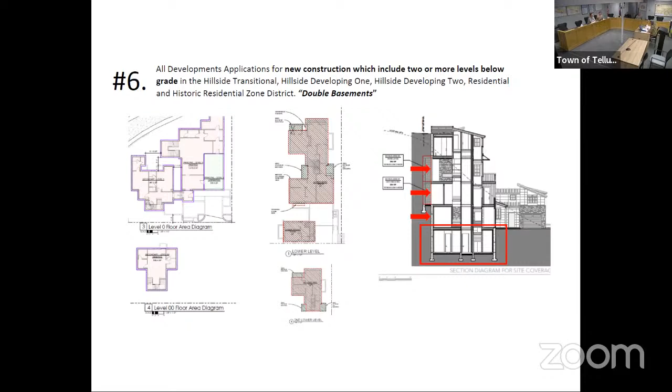Just to jump back to an earlier comment, I agree with Stacy that overall the flatter lots in town are easier to deal with. I think there's a nuance about where you judge the 15 feet—is it the average grade, or at any point along the existing pre-construction grade? It may not be 15 feet here, maybe something else, whatever that number is. I do think it's important we think about it as an overall depth and not a double basement, because you could do a 20-foot deep basement and then put another floor in later. So thinking of it as how much volume of height there is below grade is probably the right way to talk about it.

Just as a practical consideration, 18 feet is sort of the limit of micropile shoring, which is what's done almost exclusively in town. So beyond 18 feet—well, I mean, I shouldn't say limits exactly. I think part of what's happening is the price per square foot has gotten to such a point that every square inch is worth a lot. So if I have to bring in a rig and do more complicated shoring for that expensive square footage, people will.

So that begs the question: if you start to step in from the center of your lot with a deeper basement, and you're able to mitigate those micropiling and shoring impacts by stair-stepping it down—even though that might not be a really practical way to do it—would that be allowed? Or are we just going to nip it in the bud and say you can't go deeper than X?

Good question. Another way to put it is—I don't want to arrive at an arbitrary number, and I don't think Aspen arrived at an arbitrary number. I'd like to know how they got to 15 feet. What's significant about 15 feet? And if we're going to go down this road, I'd like us to arrive at a number that's defensible from a construction standpoint, not just a feeling. I think it would be a good idea to get a contractor, preferably someone who does shoring and excavation, to chime in on what's feasible and practical, rather than just architects chatting about it.

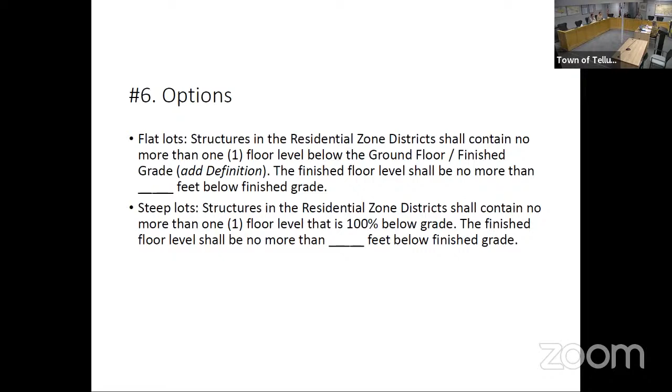Shall I go on? I wonder if there's a way to look at different percentages of allowable - what constitutes a basement versus what constitutes visible structure. What if this one was 25% and what if it was 70%? I'm going to show you some examples of that in just a minute.

Okay, so the next issue is the bonus site coverage issue. Again, this is in residential, historic residential, and hillside transitional zone districts. About 8 years ago, the land use code was amended to allow up to 10% additional site coverage, based on lot area.

There are several rules that go along with this site coverage bonus usage. The additional 10%, up to 525 square feet maximum, has to be 100% below grade. It cannot be expressed in any way above grade, meaning it can't have a window well or egress stairs - you can't know that it's there. Number 2: it has to project beyond the foundation that has walls expressed above grade, so it can't be part of the existing site coverage or foundation - it has to be beyond that outline. Number 3: it can't have any elements visible from the exterior, can't exceed 525 square feet maximum, and can't be located less than 3 feet from the side yard property lines. And if it's applied to more than one level below grade, it counts for each level - so if it's stacked, in a double basement, it would count twice.

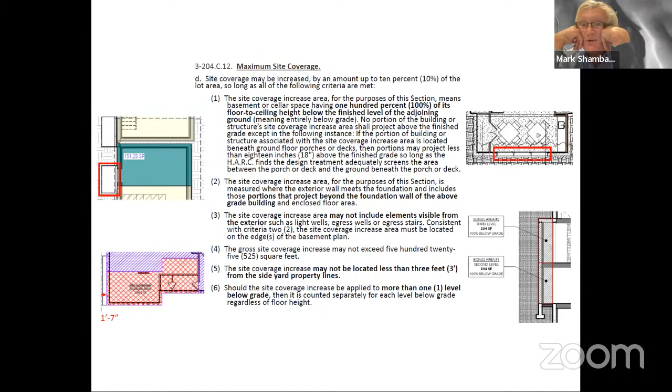But I get that it's complicated. I'm responsible for 3 of the examples, but it's... I was on planning and zoning when this came through. It was part of a larger reduction. It was part of it.

The larger exercise was aimed at reducing mass and scale above grade, which we did. And this was an attempt at giving some of that square footage back that had been reduced, not taken, it had been reduced. So the simplest thing would just be to eliminate this. If it's a headache, we just get rid of it, but then we're getting rid of something that was part of a bigger conversation. So I don't want to unravel the bigger conversation by just trying to solve this complicated, smaller part of it.

So I was not here at the time, but my understanding is that this came through concurrently with the increase of side yard setbacks on larger lots. That was part of it. Yep. But it didn't affect the overall available floor area above grade. It didn't reduce the floor area, it just pushed the balloon from the sides.

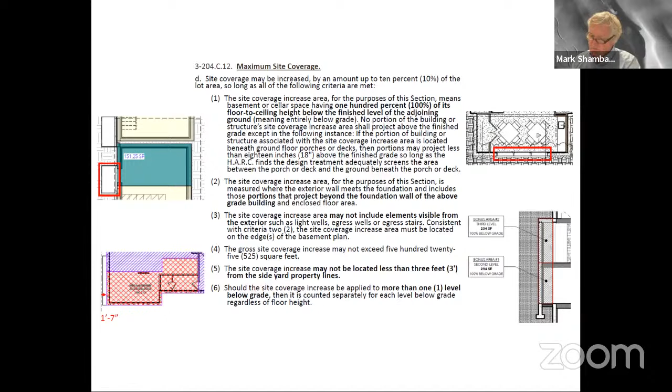I'm just making a note. Okay. So,

Number 4 is the one about steep slopes - it's a steep site, which we've identified as, for now, a grade of 25% or greater. We have had a couple of brainstorming sessions among current and previous planning staff, and we have come up with a few different possible approaches. I will walk you through some of them and show you the implications of how those might be applied and what would happen if they were.

One is the Aspen model. It's a different model. No double basements, changing the definition of basement such that it's maybe a greater percentage below grade - right now it's 50%. Limiting the number of stories that are visible, limiting the facade width, which doesn't necessarily touch the basement issue, but also perhaps limiting the maximum total area, basement and above. So I'll walk us through each one of these approaches as expeditiously as I can.

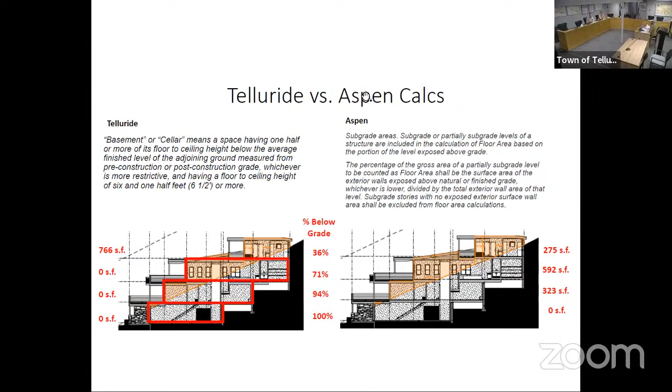I'm gonna show you some comparisons here in two more slides. But I want to talk about the next approach that we went after, which is changing the percentage of basement. Right now, our rule is 50% or more below grade counts as basement, or doesn't count towards your floor area. So in the same model, 100% below grade: second level 94%, third level 71%, fourth level 36%.

We ran some numbers on some approved projects. What if our basement was 75% below grade? In this instance, the first and second level would not count because they are 75% or more below grade. The third and fourth level would count because they're less. Does that make sense to everybody?

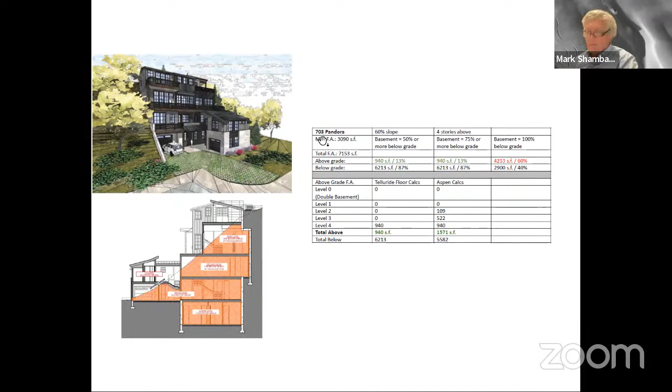So the next example, same thing: 50%, 75%, and 100% below grade. 75% did nothing, same floor area calculation. 100% below grade really blew it out of the water and caused it to go way over their maximum floor area, which is 3,090 square feet. But looking at the Telluride and Aspen methods of calculating floor area, again, not a significant difference, surprisingly.

Can you repeat what you said about the 100%? What's the numbers and what's the allowable? So the allowable total floor area is 3,090. And if this were counted as 100% below grade, it would be 4,253. So almost 1,200 square feet over.

These figures are the same - yeah, that's just the way they calculate. 75% makes no difference? Really? Nope, because of the way it's set into the hill. Because all of these are more than 75% below grade. The only one that isn't is the top level.

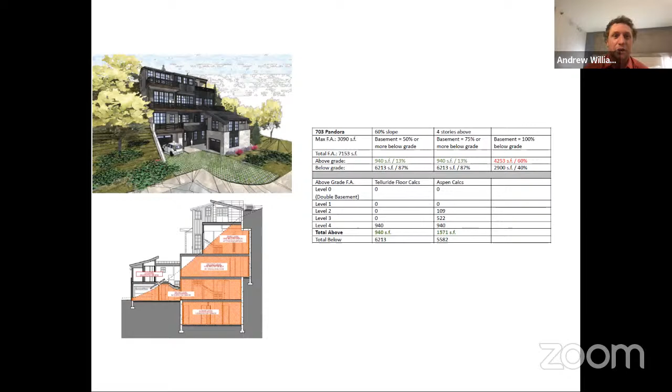So that's one of the next approaches. I'll present if you want me to just keep going. Yeah, so one option is to limit the number of stories. This one we've been talking about is essentially 5 stories - I guess you could count the below grade as 0, but it is 4 stories above grade.

This one was approved on Hillside and is actually 5 stories above grade, but it's significantly stepped up and back up the hillside, and it's very much squashed into the hillside. But we could include language in the land use code that just limits the number of stories, or how the stories are expressed, or how they mimic the topography of the site.

Yeah, not sure what it would be, but I think you look at these 2 different sites. This one is not as steep. Yeah, this one's very steep, and you're able to push it back significantly at each level, so you don't read it as a 4-story wall, which this one appears to be - even though it's got minor setbacks, it looks like a wall.

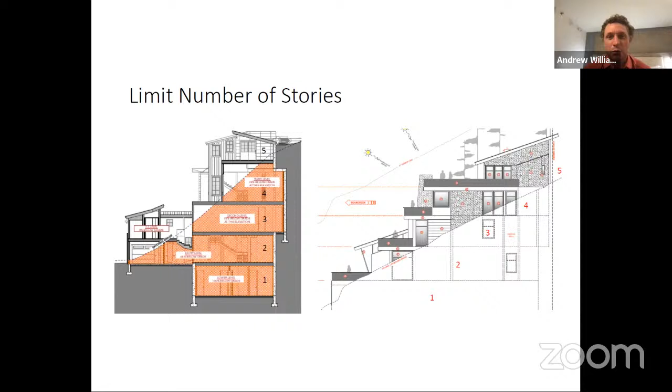Is there anything you can do in the treatment area to make it almost like a flow chart of how it works? However steep the grade is allows you to either do more or less. For example, like the one on the left, if it's super steep, then you should be able to dig into that double basement, so to speak. But if it's like the one on the right, then maybe not.

John, have you studied the volumetric calculations from the other zone district—HD2? I don't have personal experience with a project there, but I'm wondering if that would be another method to look at. It may be, and that's one that we have listed. I guess I'm not hearing clear consensus on limiting stories.

It's more about how it's expressed on the hillside. I think certain sites and certain designers can make a four-story project blend in and be appropriate, and some can't.

So it's not so much about the designer or not, it's about what they're presented with. I mean, they're way below any sort of height limit still, right? 30 parallel slope—mhm, all of these are way below the height limit.

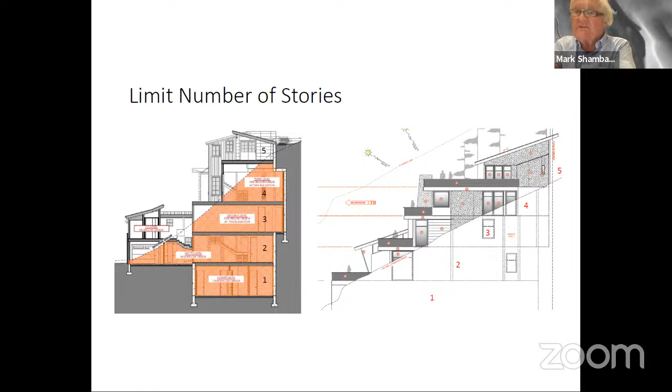Well yeah, but I would hope, even though it's not fair, to demonstrate it more radically - it shows the difference between what we sent home packing in just a few minutes versus what we approved. And I think if P&Z saw this on the screen, or the council, they might feel more comfortable that we're doing the right thing with mass and scale based on the topography.

I think I'm kind of hearing a consensus, other than maybe investigating this basement height and maybe looking at taking 50 to 75, but I'm not sure we have consensus for 100, and that's taking away square footage that we have. Our main mission would be to get the scale solution.

Unless, I don't even know that we could adjudicate or change the land use code to say the design guidelines say the 4th floor must be set back X feet, because it really does depend on the slope. And this is just such a good example. But I'm open to anybody else's comments here, in summary.

Just to clarify, if we're talking about percentages or other ways to judge basements, we're really just talking about these hillside zone districts, not a wholesale change of the definition that's brought through the rest of town. It seems like there will need to be two different definitions, or ways to judge basements depending on the zone district, or maybe it's just the steepness of the hillside, right?

What else can we help you with, John, as far as feedback? Well, I'm getting the sense that everyone's kind of tapped out. I think this is difficult, and if it is, you could give us this packet, we could think about it a little bit more. Maybe we'll come up with some other ideas.

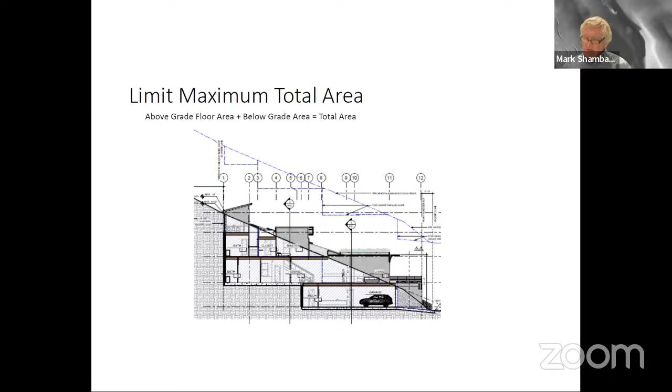So treat that some way. I think number 2, number 4, and maybe number 5, not as stated, but looking at some basement height. John, I'm hearing, correct me if I'm wrong, that there's further examples or investigation we'd like to see on 2, 4, and 5, changing it to maybe the height of the whole basement. So you're saying the percentage of basement and facade width and total area, you would like to see more analysis?

Well, but I think for total area, we gravitated to something new, a 5A or 5B - the height, using the parallel slope method, the depth of the basement. Yeah, not the area. Correct me if I'm wrong, but I think we gravitated to a 5B. Bob, could you expand on what you said? I thought you were describing a way to calculate total area, floor area, and then divide it between what's basement and above grade, looking at some kind of ratio. Is that correct? I think so. I'll think back on it.

I was looking at more in terms of the review. Is there a number that we can use that guarantees these big buildings get put into the full board?

You know, anything totally over 2,500 square feet or 4,000 square feet or whatever. Some of these buildings are 8,000 square feet and there's only 1,100 square feet that shows. I think that's worthy to look at.

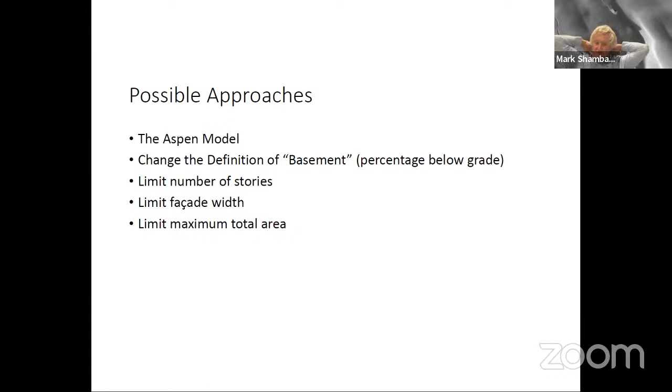Well, you did a great job of coming up with five approaches here, but I'm thinking that we could look at this separately. We can look at figuring out the scale solution, like maybe something that Bob selected, whether it's above or below ground, X square foot. And maybe we should look at a what-if at number 1, because right now I thought we were suggesting number 2, something between 70, or just to see if it's not 75, is it something else? But does the board feel that we should look at, if it's not 75, something else, plus look at this volumetric idea from the Aspen model also, or discard number 1?

Mark, at the risk of sounding like I'm re-summarizing a summary, I don't think the Aspen model makes a lot of sense from a logic perspective. It makes sense to count what you see, but it's not getting us to the goal necessarily any faster than fiddling around with percentages. I don't think either of those methods, unless I'm wrong, are moving the needle enough towards our goal.

That's why I think we spent more time on this - I don't have these memorized by number the way you do, but 3 and 4 perhaps. Just to kind of re-summarize Stacy's summary.